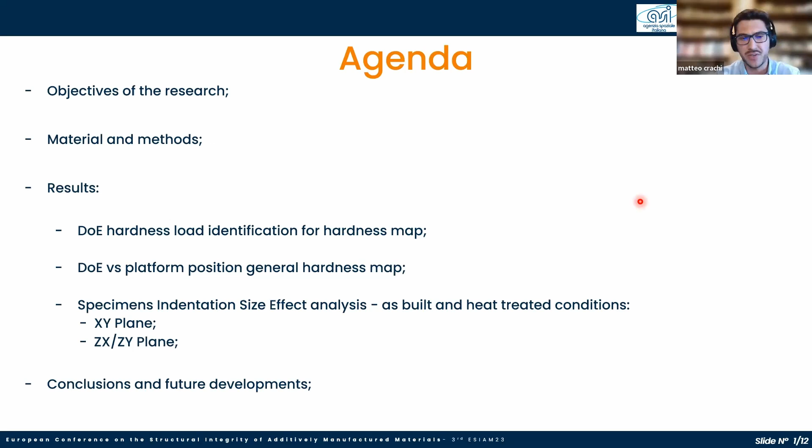The agenda of today: I will quickly go through the objective of this research, material and methods, the results. So the identification of the correct load in order to characterize the hardness map of our design of experiment. And then I will quickly present the indentation size effect we found with respect to different planes, so the XY plane parallel to the building platform, and the ZX, or if you prefer, ZY plane, with respect to different conditions, the as-built condition and the heat-treated condition, finishing with some conclusions and future developments.

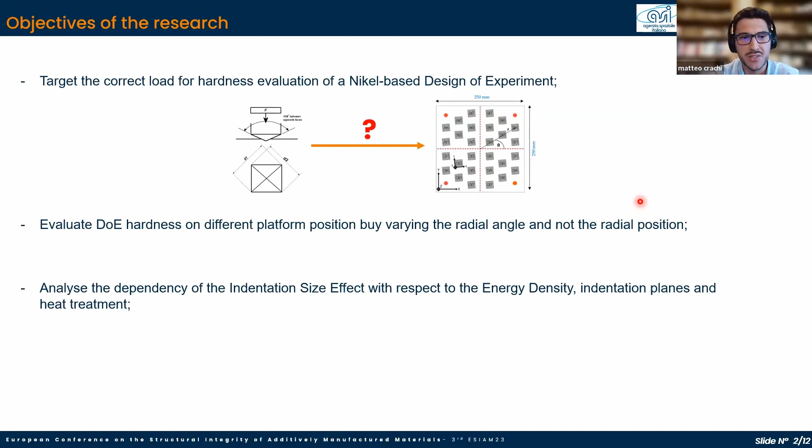The objective of the present work is to target the correct load for hardness evaluation of nickel-based alloys with respect to our design of experiments. So the question was, which is the correct load to use in order to characterize the hardness with respect to the whole platform. What we would like to present is the evaluation of the hardness on different platform positions by varying the radial angle and not the radial position. I will explain this sentence on the next slide, and then analyze the dependency of the indentation size effect with respect to the energy density, the indentation planes, and the heat treatment, or the specimen conditions.

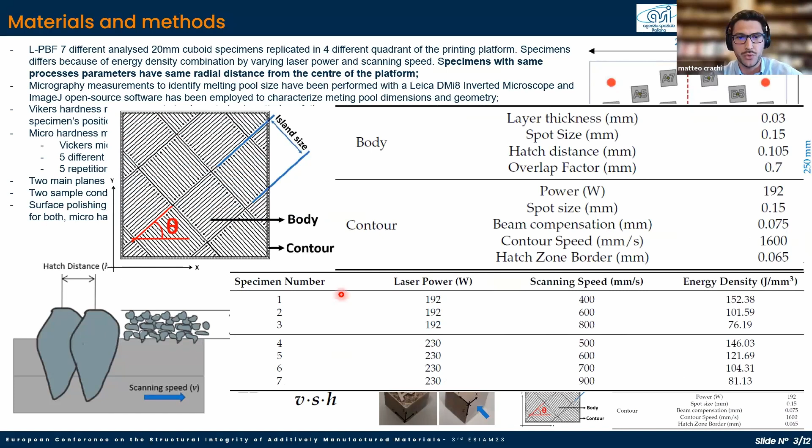So a few words about material and methods. We printed cuboid 20 millimeter specimens with the laser powder bed fusion technology. We divided our building platform in 4 different squared areas, as you might see on the right hand representation, and our specimens differ because of the energy density combination. By this, I mean we modified the laser power. So we have 2 main laser powers and different scanning speeds in order to have 7 different specimens, and we replicated the 7 different specimens in our 4 areas.

Micrography measurements have been used to identify the melt pool size, and they have been performed with a Leica inverted microscope, and ImageJ open source software has been employed to characterize the melt pool dimensions and geometry. Vickers hardness measurements characterize the scattering of the mechanical properties with respect to the specimen's platform position. Then, in order to characterize the indentation size effect, we randomly selected a quadrant, the bottom left C quadrant, a Vickers micro indenter, and 5 different loads. We started from 1 kilogram down to 25 grams, with 5 repetitions per selected load in a random area with respect to the analyzed printing plane.

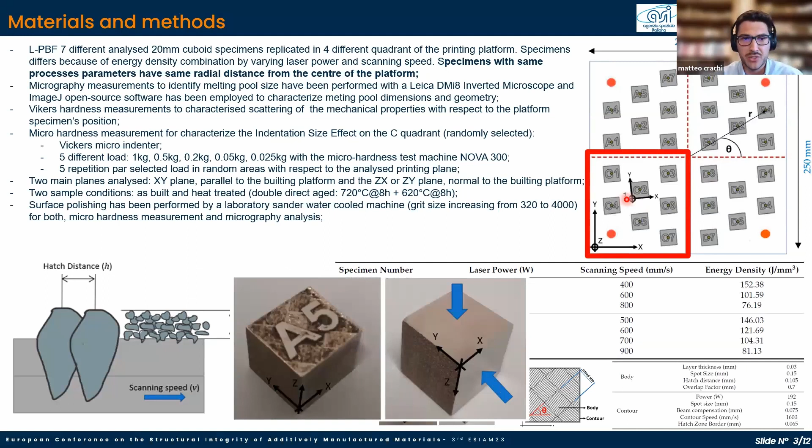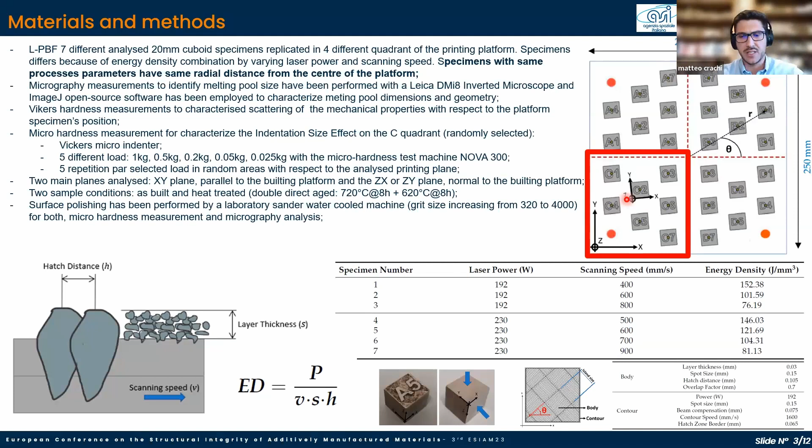We targeted the 2 planes, the XY and the ZY or ZX plane, if you prefer, and two main conditions, the as-built one and a direct aging condition. So I heat-treated the specimen, and in order to target a good quality for the hardness indentation, we polished the XY and the ZX plane.

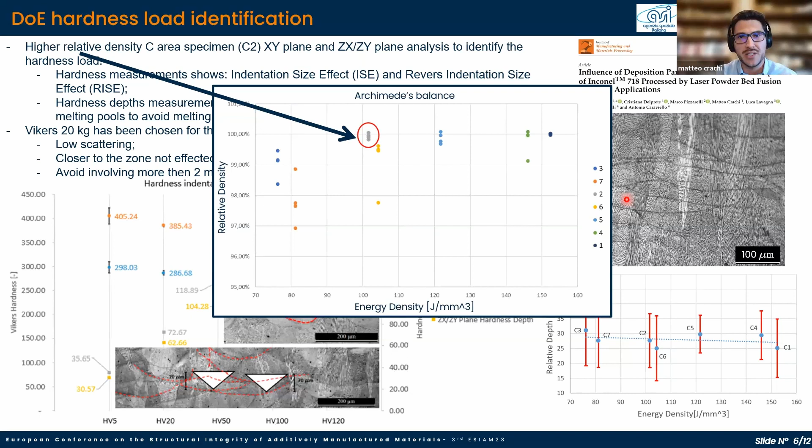So our first topic was to identify the correct load in order to map the hardness around the platform. We identified the highest relative density specimen, which was actually C2, and the XY plane and ZX plane were analyzed in order to identify the hardness load. As you can see in the bottom left chart, the hardness measurement shows an indentation size effect and a reverse indentation size effect.

If we then analyze, what we've done basically is analyze the hardness depth, and we use this in order to identify the maximum load to penetrate not more than two melting pools. So the result shows that the 20 kilograms Vickers load has been chosen for the hardness map that I will present to you in the next slide.

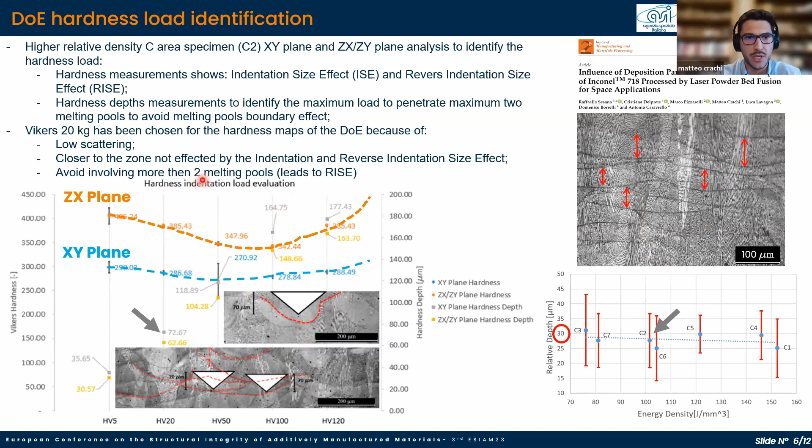And this was because of the low scattering, and it was closer to the zone that is not affected by the indentation and the reverse indentation size effect. And because we think that the reverse indentation size effect is linked to the melting pools, we identified this load in order to be sure that we do not penetrate more than two melting pools.

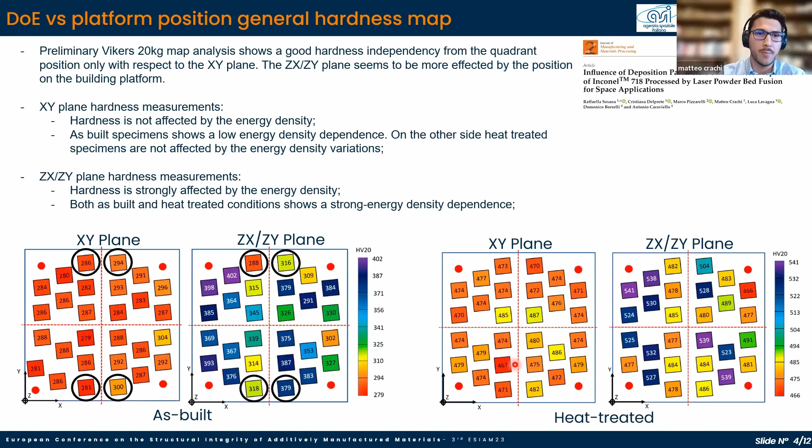The XY plane hardness measurement, so the bottom left chart, you can clearly see that the hardness seems to be not affected by the energy density. So by increasing the energy density, the hardness seems to be not affected. The as-built specimens show a low energy density dependency, as you might see on the bottom area of this chart. On the other side, the heat-treated specimens are not affected by energy density variation.

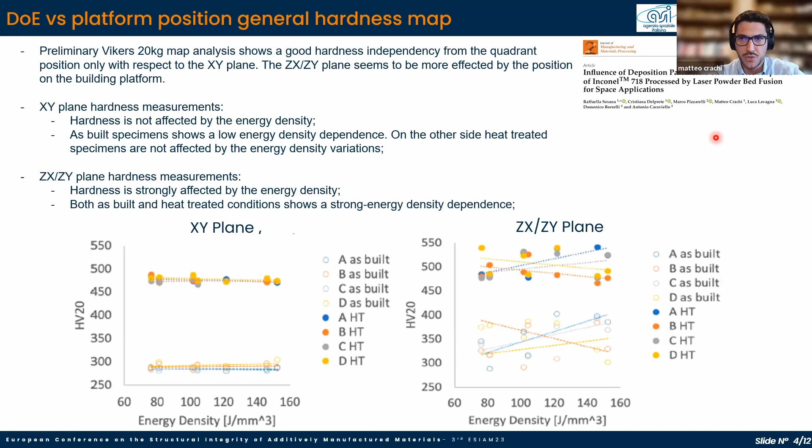On the other side, the ZX/ZY plane, presented on the right side, we can clearly see that hardness is strongly affected by the energy density for both the as-built and the heat-treated condition, and they show a strong energy density dependency. All these results have been published in our recent publication that you might see on the top right area.

One of the reasons why you can probably see this kind of scattering, from our point of view, is the scanning strategy. We used an island scanning strategy, and if you think about the layer by layer deposition and the strategy, we think that the arrangement of the strips can affect the measurement, especially on that plane, and this could be one of the justifications for this scattering.

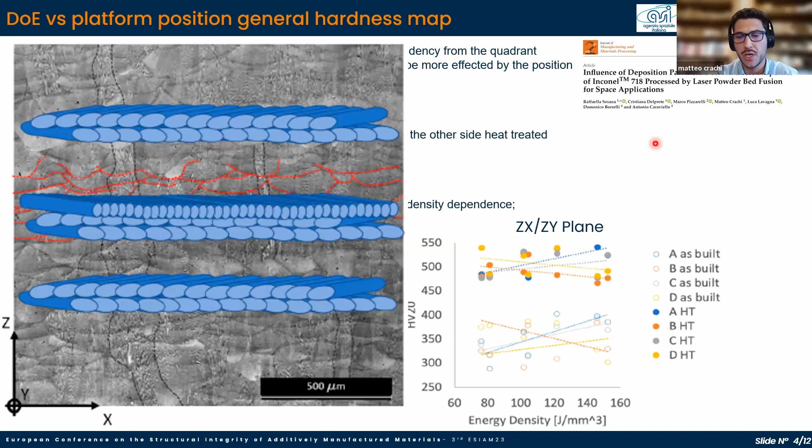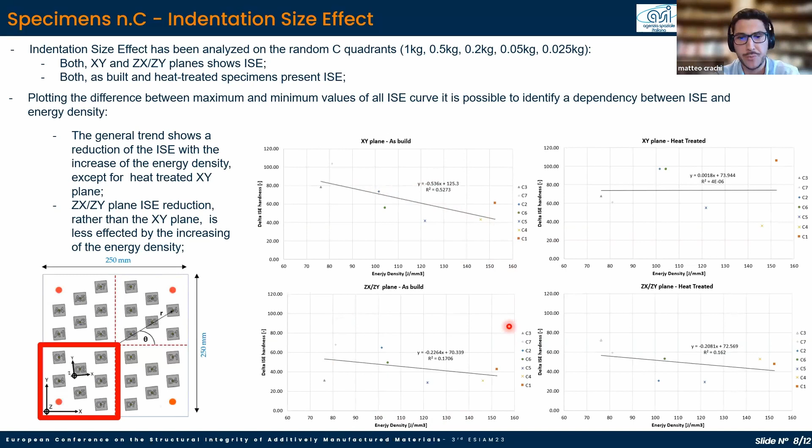About the ZX plane, for the indentation size effect there is a reduction rather than the XY plane, and it is less affected by the energy density. So by just comparing the slope of these two curves, you can definitely see that the ZX plane seems to be less affected by the energy density.

Just to conclude, laser powder bed fusion additive manufacturing nickel-based alloys are affected by the indentation size effect and the reverse indentation size effect. The printing position seems to have a higher scattering effect on the ZX plane hardness measurement and a lower scattering effect on the XY plane measurement. The ZX plane hardness, rather than the XY plane, is more affected by the energy density.

The indentation size effect is affected by the energy density and the analyzed plane. Higher energy density deposition leads to a lower hardness variation, so a lower indentation size effect. And on the other side, higher on the XY plane. Heat treatment tends to reduce the indentation size effect only with respect to the XY plane.

For future development, we think that the analysis of the relation between the indentation size effect and the melting pool internal grain size by EBSD analysis should be performed, and we would like to extend this study with respect to the reverse indentation size effect.